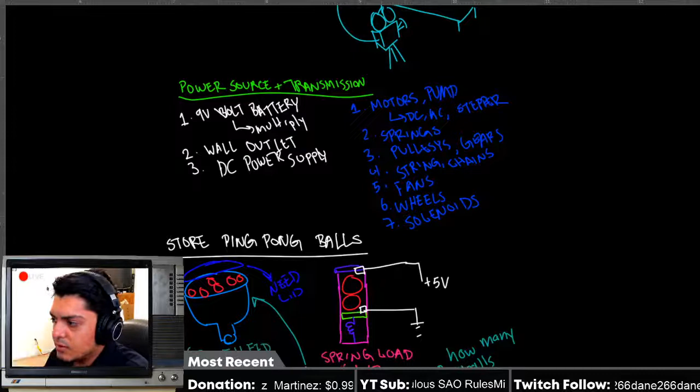We also went over the different power sources. Sorry about this, I realize it should look like - there we go, that should look a little better hopefully. So we went over the different power sources. This is going to be a stationary device, so I really believe we're just going to use a DC power supply - there's no reason to make it wireless.

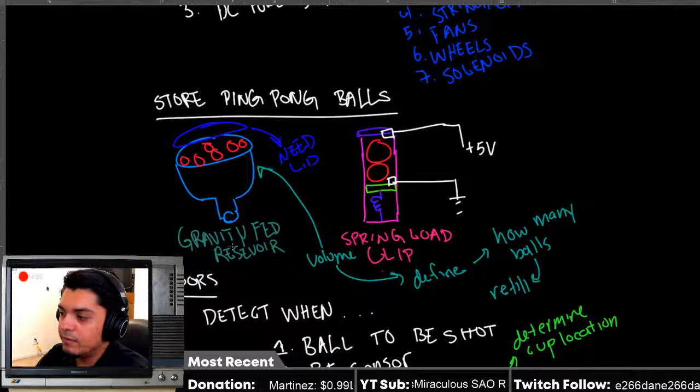And then we also went over the ideas of how to store the ping pong balls, how we're going to reload or just load the ping pong ball launcher or shooter. We came up with 2 different ideas: using a reservoir, basically a bowl, and then gravity feeds into the launcher, or we use a spring-loaded clip - just use a spring to push a ball up to the position where it needs to be and then launch it, and it repeats the action since we have a spring.

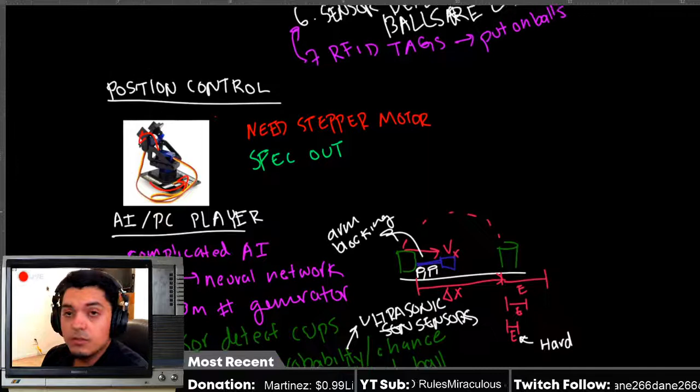We also went over the different sensors. There's a lot of different sensors we can potentially use depending on what design we choose to go with. And then position control - this is how to control the position of the ping pong ball shooter or launcher. Basically, we need to orient the launcher horizontally, so there's some rotation this way and then some rotation this way, so that way we get all positions controlled, I guess.

And then for later features, we have AI and PC playing ideas. This is again way later on in the project, but let's say if we don't want to do this over the internet, we could just have this robot play against yourself, I guess. We came up with different ideas how we're going to do that, what other features might be useful or make the game more fun.

And I believe that's it. So that was a brief overview of what we did. Going back to here, we'll come back to the spring-loaded shooter in a bit. I think we should just finish up these last two so we could finally choose a design or a mechanism.

Okay, so the pump air shooter. How this mechanism works, just to refresh everyone's memory, essentially what we have is a pump. I drew it as a hand pump or a push pump, I don't know what you call this, but essentially we pump air into a vessel or reservoir, and the reservoir is closed off, meaning it could store pressure. We basically store whatever amount of pressure we need to vary the length of the ball being thrown.

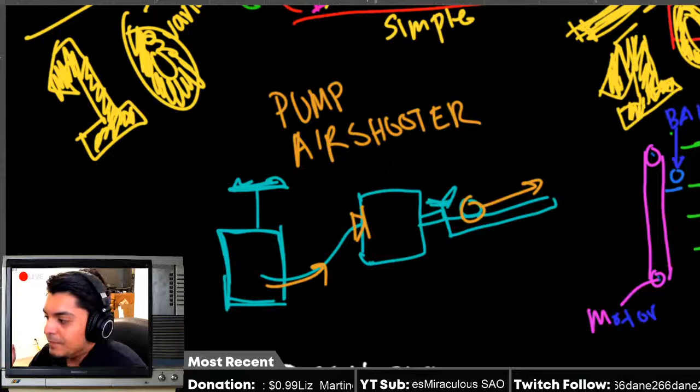So yeah, a check valve just basically prevents air from going, or allows air to only go one way, I should say. So there's that.

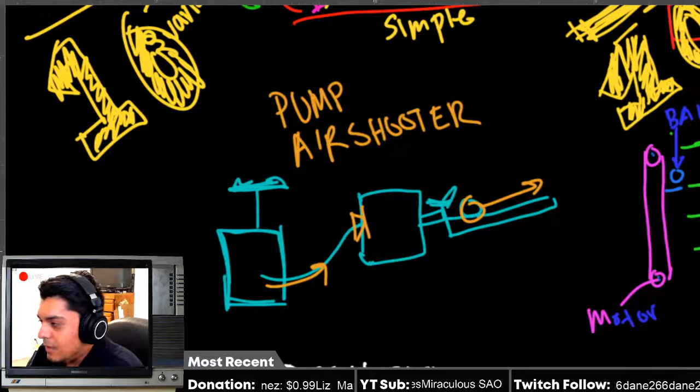So how we're gonna do this? To be honest, this is no different, in my opinion, from the fan shooter. And the reason why I say that is because the principle is practically the same. The only difference is how we're gonna basically move the air, right? I mean, here we have a fan. Here we have a pump to store pressure.

A cool thing about this is that we could load a ball whenever we want, as long as the valve is closed, which is a better design than here. Because last time we were thinking about why the fan shooter would be a difficult design, and it's because we need to place the ball at a specific moment to even have the device work properly.

And the reason why I say that is because we need to vary the speed of the fan, right? And the ball needs to be launched at a specified distance, or whatever is determined by the user. And if we put the ball in place, right here, and then turn on the fan, there will be a minimum threshold at which the fan speed will start increasing the ball's movement, or the ball will start moving at some minimal threshold.

And that can be an issue, because if you want to launch the ball at a specific fan speed, we won't be able to do that. So what that means is we need to get the fan speed up first, and then put the ball where it's supposed to be, so it can be launched at the correct speed.

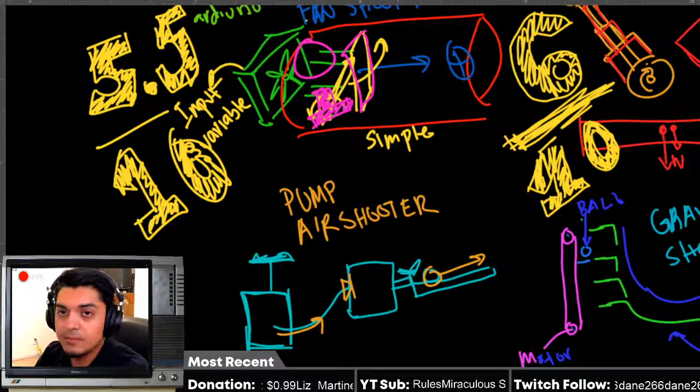Hopefully that makes sense. And this design makes that simpler, because we have this valve here. That means we can store all the pressure we need before, regardless of where the ball is. So that's a plus in this design. I don't know what you would categorize that as.

Convenient? How do you say it? It's just a better, or it's not ball dependent or ball location dependent, which is a plus.

I swear this page is gonna be so cluttered by the time we're done. No ball location dependence. So that's a plus, I think that's a plus. That may be an issue, but as far as I see it, it's a plus.

Another thing - hey Dane, nothing much has changed recently. I just had a pretty casual weekend, you know, just hanging out, nothing too crazy. How about yourself? I don't know, what have you been up to?

So besides that, we don't have to use a hand pump. We obviously don't, because we could just use any other pump, really. We could use an electric pump, air pump. Yeah, we don't have to use this hand pump, so that's just for pictorial purposes.

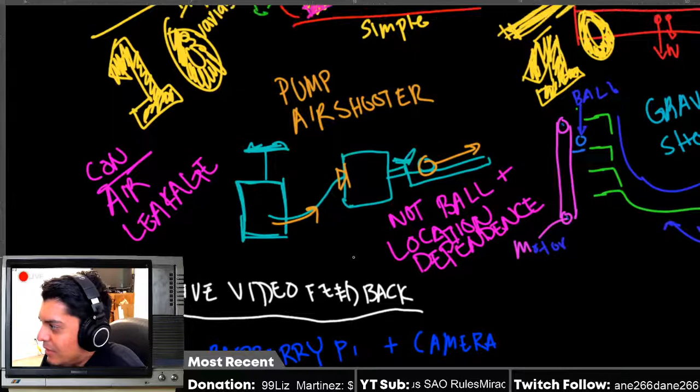To be honest, I want to just start 3D modeling—just start designing this thing, getting into the technical details. But it's going to take some time. Hopefully by the end of this week we get everything situated and ready for some actual design and building.

I don't see what else could be an issue. I guess controlling the pump—oh no, you just turn it on, I guess. Controlling the valve, we'll probably use some sort of... I'm pretty sure there's some kind of valve you can control electronically.

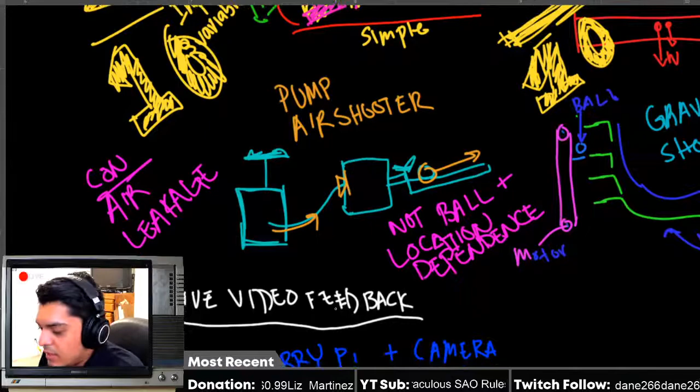I said there's 2 motors per joint—I'm referring to the catapult. 2 motors per joint for a simple arm. I don't know what the second motor is used for. Maybe that's... yeah, I'm not too familiar with robotics, but if they say 2, I guess they use 2. I'm not sure why they need 2. I could think out loud, but I don't know why.

Maybe to offset it? Yeah, some things you just get surprised about when you learn something new. It's just like, wait, that's how it works? And you're like, yeah, that's how it works. So, yeah.

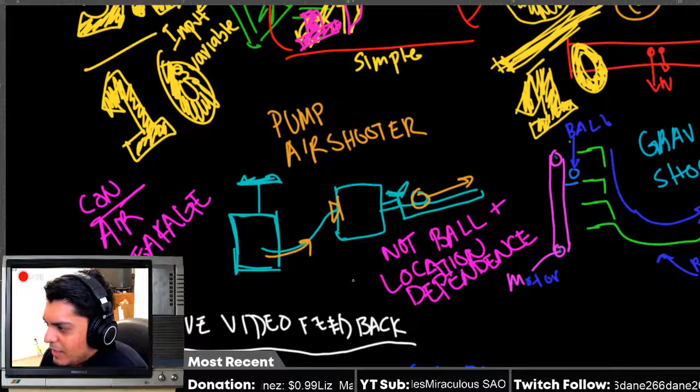I don't have anything else to say about this pump air shooter. It's good, I don't know if it's the best. Well, let's put it in relative terms—is it better than the fan shooter? Maybe. The only problem with the fan shooter is if you could figure out how to place the ball at the right time, then it's not an issue.

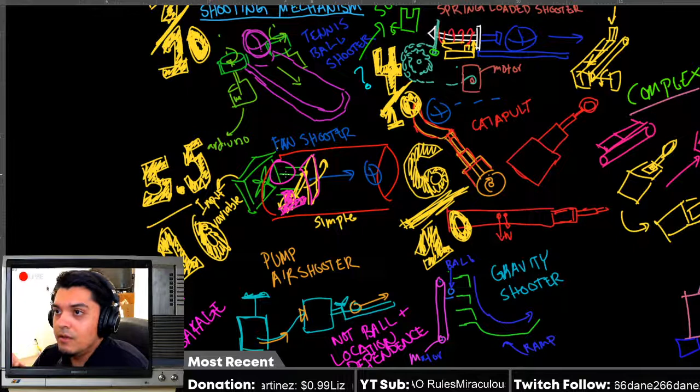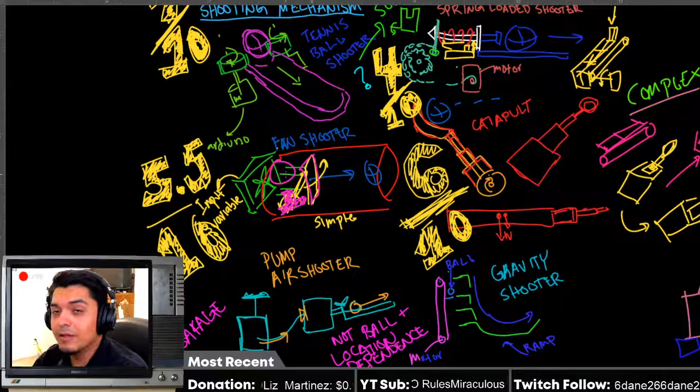Some said 6 motors, but that might be for the whole thing. 6 motors is a lot, to be honest. Yeah, because some of these robotic arms, as much as I know, have various degrees of freedom. There's 6 degrees of freedom, right—translation in X, Y, Z, so you can move in that space, and then rotation around each axis. So if it's a full-on mobile robotic arm, maybe it has the ability to do that, and that's why they need 6 motors. Maybe that's what I'm thinking. That's a pretty crazy robotic arm if you think about it—it could move fluidly in space. That's pretty crazy.

Okay, so relatively speaking, it's on par at least with the fan shooter, I'll give it that. Is it better than a catapult?

The catapult is a more difficult design simply because we have to take into account the length of the arm—how far the ball is from the axis of rotation, because that determines the speed of the ball, the linear velocity of the ball. So it takes in more things we have to worry about. It's more technical, but that doesn't make it a worse design—it's just more technical. But that does require knowing where the ball is on the arm.

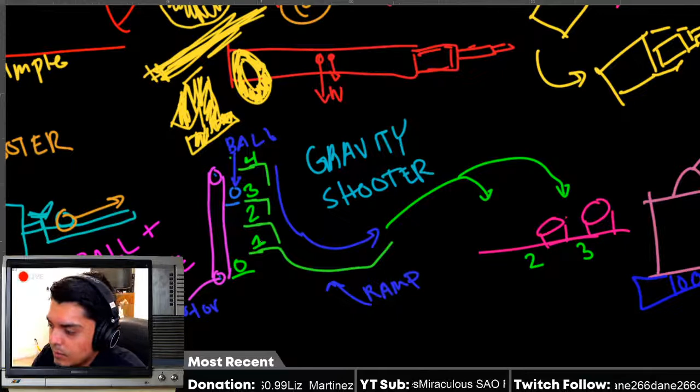So if someone wants to launch the ball very precisely, like maybe what if we place the cup in a position—let's say we have a table, right? This is a cup, and then here's another cup. What if we say, if we launch the ball from state 2, we launch the ball and it happens to land right here, and then we launch the ball again, and what if we land right here? Since those positions are technically, in theory, locked in place, the user can't go in between 2 and 3 because their power levels are dependent on the predefined system that doesn't change.

So if the game happens to place a cup, which is likely, in a spot that this mechanism can't launch at, then we can't do anything about that. So it's almost like the user is stuck in limbo because they can't accurately get the ball to hit the cup. That's pretty major, because now we gotta be worried about the position of the cups, or the physical position of the robot. So that is definitely an issue, I think. Now it might be negligible, but it is still a possibility. That affects the game tremendously, and I feel like that's pretty big.

What else can go wrong, or what can go right? It's gonna be huge, I think this thing is gonna be big. This is a fairly large system. So I don't know, like if we do some quick math to figure out how high this would get—well, I guess this depends on the angle, really.

It's not based on—well, it is based on how high it is, but actually the angle should be 45 degrees, and I'll tell you guys why. The angle should be 45 degrees, simply because if you do the math and all the analysis, 45 degrees will launch the ball such that it's the farthest distance that the ball can go. So we would have to make sure, if we want to really optimize the efficiency of this ramp, we want to launch the ball at 45 degrees. Again, because that's the maximum distance the ball can travel or be launched at, given the system. So we would want to give that 45 degrees.

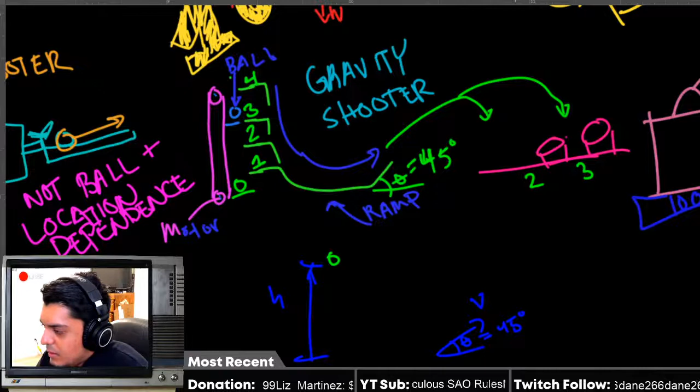By knowing that, we could determine that if initial potential energy goes into kinetic energy, mgh is equal to the final kinetic energy, which is 1/2 mv squared. So we could find the velocity to be square root of 2gh. That's the magnitude of the velocity when it leaves the ramp.

So from there, we know that the farthest distance is dependent on the horizontal velocity of the ball. This is actually a pretty classical problem. If you're studying physics, you would definitely see something like this.

Again, this is the ramp, so we're launching it. The horizontal velocity, Vx - I haven't done stuff like this for a while, so it's a nice refresher - the magnitude, which is square root of 2gh, times the cosine of theta. This will determine how far we could launch the ball in theory.

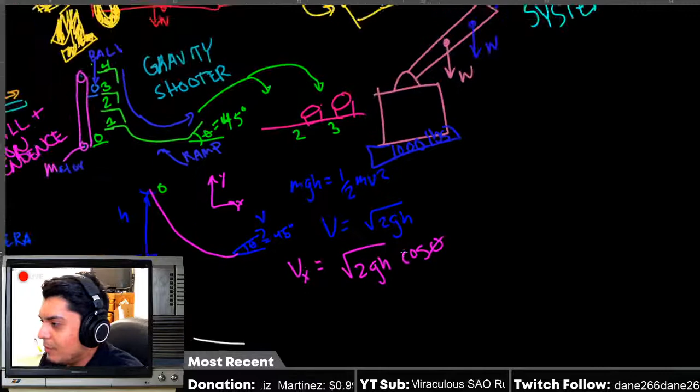If we're given the speed, what else do we need to know? That's the initial velocity in the horizontal direction. This is going to be more detailed than I thought. I don't want to do all the math because I don't want to bore you guys, but essentially, once we get the horizontal velocity, we can determine the distance.

So distance will be velocity times time. We don't have to make this time dependent because we know that when the ball's launched, it's going to come back to the same location in theory. So this will be the maximum distance, from here to here - we'll call that d. We could use that to determine how far we could launch the ball.

Maybe we're overshooting it, to be honest, but we're in control of that - we're in control of h, so we could control that completely. We could vary this height to determine our actual bounds. This is getting too detailed because we didn't choose this mechanism to design yet, but this can tell us whether or not we're going to hit the cup.

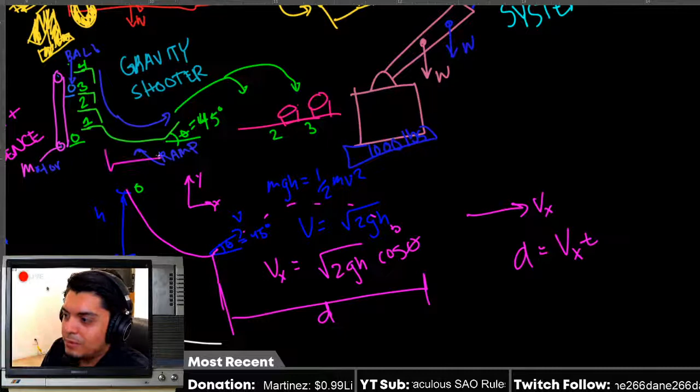Maybe we're going to overshoot the cup, maybe our ramp is going to be too small, or maybe practicality comes into play and we make this ramp too long. There's a whole lot of different criteria when it comes to this, but I don't want to go too deep unless we choose this design. The point is, if we have a discrete system, we want to make sure it's still able to hit every cup on the table.

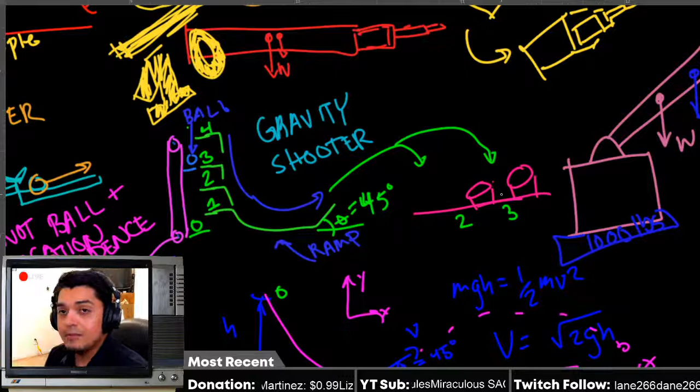If it doesn't, that's a major issue - I believe that is a big con. That's what that brief tangent was about. Con: I'm going to call it limbo, because if the player can't hit this cup ever based on our design, then they're in limbo - they can't progress anymore, so they're stuck there. I feel like that's probably the biggest flaw out of all of them, in my opinion.

Because all these other designs seem analog, or they're variable. The spring-loaded shooter, if we change it to a piston, I still have to think about that - I'll research more about whether we can make it variable. But yeah, every other design has the ability to be fine-tuned or be a precise number if need be. So maybe not the best design - pretty cool in concept, pretty classical, pretty old school.

It's also going to be big - I feel like that's a drawback. If you can't put this on a table or on a stand so it's level with the table, that's an issue. What are you going to do? You're not going to launch this from the floor. I mean, I guess you can, but it's more inconvenient in terms of space. So it's also big.

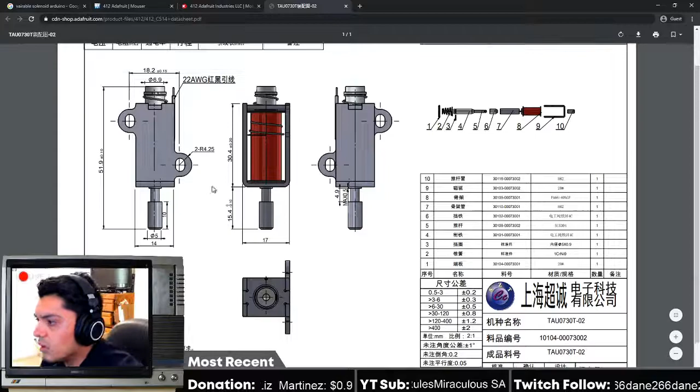Oh, DigiKey as well. Yeah, classics. Where's the... okay, we got a drawing. Ooh, okay, but it doesn't tell me. I'm assuming Chinese, it's 24 volt, which may be an issue. Is it DC? That's DC 24 volt, but can we vary it?

Let's see how to vary a solenoid. There's solenoid actuator theory, let's see. Solenoid and the basic electrical, yes. In and out, yes. So the solenoid moves in and out to control the piston, and restores its original state by using a spring. Yes. Both types of solenoids, linear and rotational, are available as either a holding, continuously energized, or a latching type, on-off pulse, with the latching types being used in either energized or powered off applications.

Not what I'm looking for. Okay, right here: linear solenoids can also be designed for proportional motion control, where the plunger position is proportional to the power input. That is exactly what we need. When the electric current flows through the conductor, it generates a magnetic field. Yes, that's how you control it.

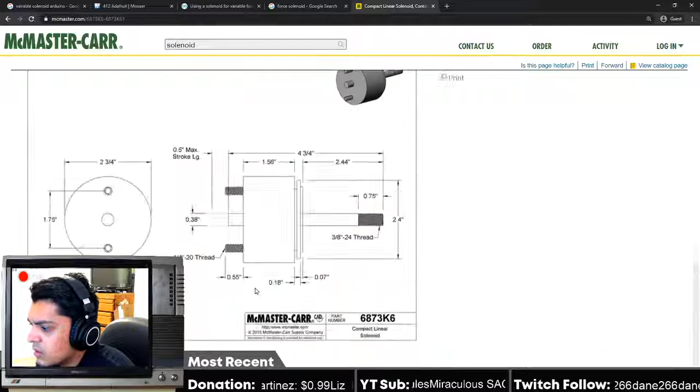How do you wire this as well? I mean it's probably pretty obvious, but you just connect 12 volts to it, I'm assuming. I'm assuming these are the positive and negative leads. So it's a 1/4-20 thread. We don't need... does it give you a spec sheet? I guess this is a spec sheet. Does it come with a wire? What if I did this? What else is important, the diameter?

Yeah, it's fine. We just need to make sure, I guess another important thing when it comes to launching the ball if we use a solenoid, is to make sure that the piston lines up directly in the middle of the ping pong ball. It shouldn't be a problem, in theory it shouldn't be a problem, but it might be. It's also dependent on the tube that we choose, so you have to think about that.

But besides that, I feel like it's $162. I don't know about that one. That is a no-go. Okay, let's try something else. I didn't think they were gonna be that expensive.

What if, okay, let's say 12 volt or 6 volt DC. No, 12 volt DC. Oh, we don't need sealed.

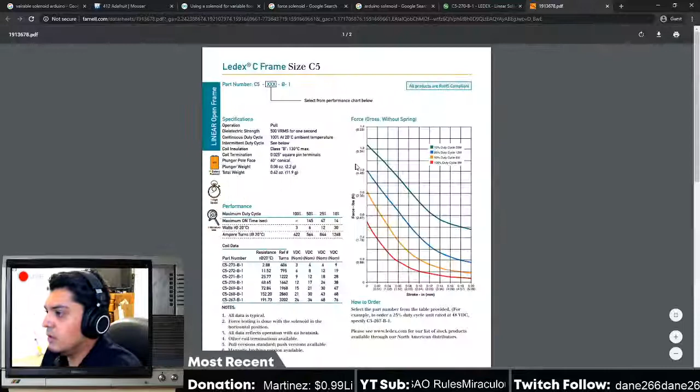Continue, okay wait. The C frame, 500 VRMS. Oh here we go, I missed it. Okay, let's see, oh here we go. Force graph without spring. Okay, so this is it being pushed back, that's what this graph is showing. So what do we have? Well, this is a pull. Oh, we want push, do we have push? Oh, we don't. Great.

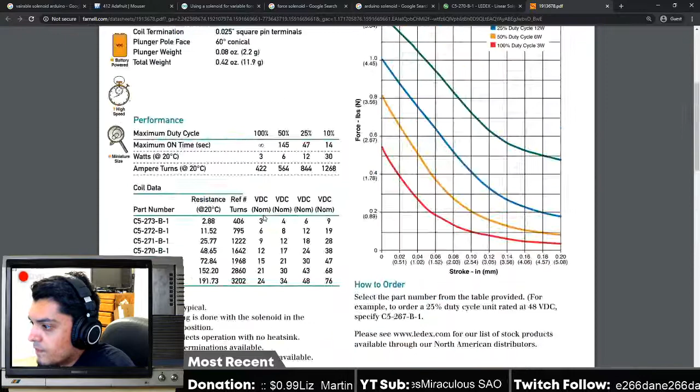Okay, so here we go. 100% duty cycle, 3 watts. So we're getting around half a pound of force. That's probably fine. I can't put that in perspective. Like if you throw a ping pong ball, how much force are you giving it? Not much, probably.

So if we give this 10% duty cycle, we get... oh, now I get it. I think I get why there's an inverse relationship between the percentage of the duty cycle to the power. Because I think this is the problem I had last time. I was like, why is that happening? But I think it makes sense. What it's saying is that...

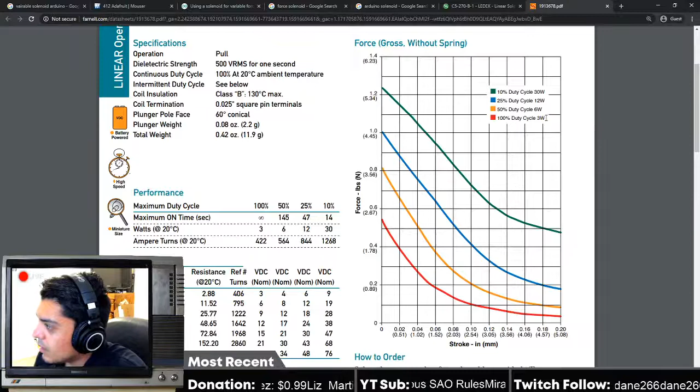If we put 100% duty cycle into the solenoid, what a duty cycle essentially is, is a frequency or a wave of on and off. So it looks like a square wave. Let me show you a square wave. This is my thought process, maybe I'm completely wrong about this, but it seems like it makes sense. So this right here is called a square wave. It's pretty self-explanatory: basically we have a -1 state, or an off state, and then we have a +1 state, being an on state. And then the duty cycle is basically how frequently it is on. So when you have 100% duty cycle, it's going to be a straight line, basically a straight line at 1, meaning it's always on.

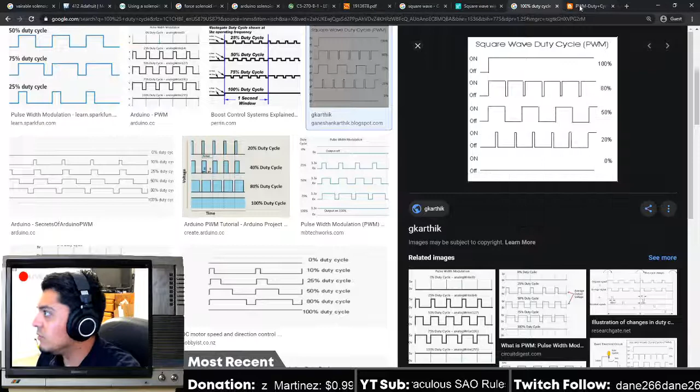So let's see if I could maybe show you guys that 100% duty cycle. If it shows up in Google, I think I am right. Here we go, yeah, so this is probably a better image. So this is our on and off state. 100% means it's always on, 80% means it's on 80% of the time, 50% means 50% of the time, and 20% means 20% of the time, 0% of the time, and so forth.

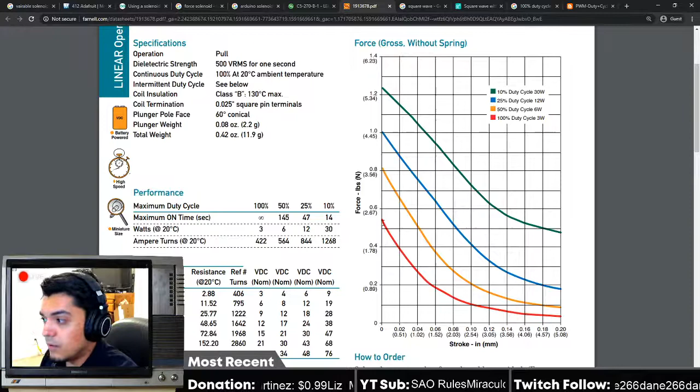So the reason why I think there's an inverse relationship between the solenoid's duty cycle and the power input is that if you have the solenoid always on, it doesn't allow enough time for the magnetic field to build up in the solenoid. Therefore you get less force, so that's why we get a low force, which is red. So if you have a 100% duty cycle, it's saying that we put 3 watts in because it's not a lot of energy to launch the solenoid, since it doesn't have enough time to recharge or rebuild that magnetic field. And therefore we're getting a low power input, or output, I should say.

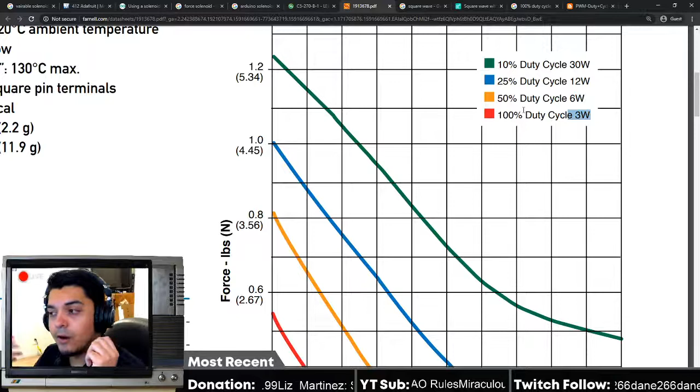So if we have 50%, it means it's 50% on and 50% off. During that time of being off, I'm assuming - correct me if I'm wrong - that being off allows the magnetic field to build up, giving it more energy to be launched at a higher speed. That's why I think there's an inverse relationship. So if you have a 10% duty cycle, we should be able to create 5.34 newtons of force, I think. So given that, we can vary this thing, and if we could get 5.34 newtons out of this thing, this is pretty good.

Dane, you're crazy, I'll give you that. Yeah, I remember staying up late, this was a while ago. By the way, if you guys are listening, Dane, he's a frequent member in the chat. He's pretty much up late. I'm guessing somewhere outside the U.S., I'm not sure, but he's basically up late watching the stream, which I really appreciate. Dedicated fan, I really appreciate that.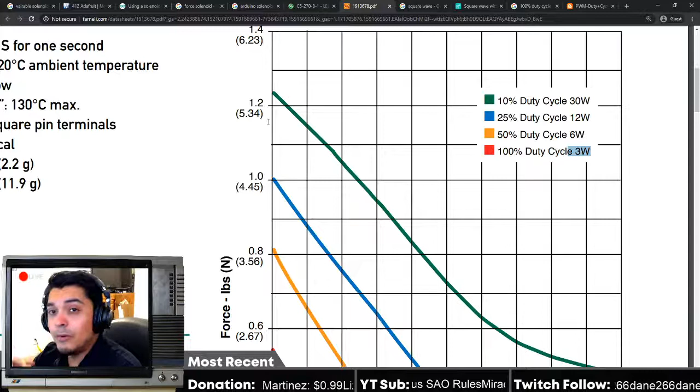But he's out late, and it's already becoming light outside. So I remember this one time, it was like a while ago, back when I was a kid. I slept over at a friend's house, one of the first couple times I slept over, and I remember we just stayed up all night playing video games. We did not care, it was one of the funnest times. Yeah, those were the days, just playing video games all night.

3:33. Damn, that is pretty early, I'll tell you that much. That is pretty early in the morning.

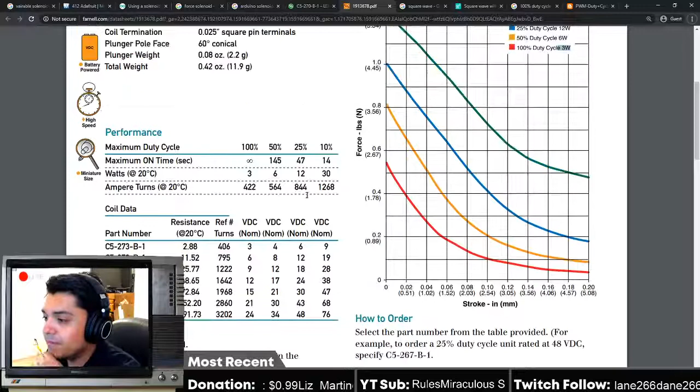Anyway, getting sidetracked a little bit. So yeah, I think we're fine. I need to see how this thing works though. It's high speed, it's small, it's lightweight, and that means we could put this thing on something that can move and rotate probably pretty easily.

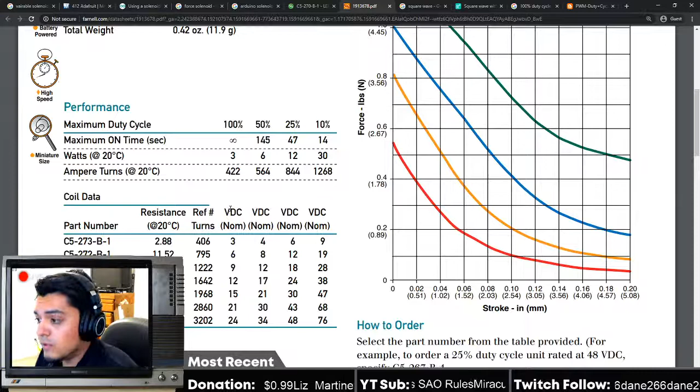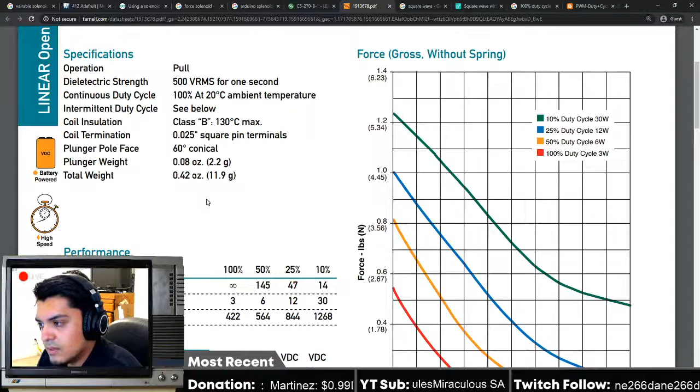Does it give us the weight? Plunger weight, total weight - about not even an ounce? Not even an ounce? It seems so light. Huh, okay. How small is this thing then? Wait, they had a diagram. I'm assuming that's in inches and bold, and then this is millimeters.

Yeah, wait, so how does this thing work? If you guys have never seen an engineering drawing before, this is called an engineering drawing. It's very loose, more consumer friendly than anything. But how they display these different views is two-dimensionally, because we give a piece of paper to someone and tell them how to build it, or at least give them some idea of how it should look. It's very useful if you buy parts and need to inspect the part before using it, because if you don't inspect it, you don't know if you got the right part or if something's wrong. It's basic inspection - this is how they show how to fully define an object without using words, or using a minimal amount of words.

So this is a third angle projection, I believe, meaning this is the most common way engineering drawings are done in the US. This is the front view, the front of the device, then the right view, the right side of the device. Then the left view, left side of the device, then the bottom view, and if they had a top view it would be up here. Technically you only need 3 planes - depending on how complex the part is, you only need 3 planes to fully define the part. Here they did 4, simply because there were holes on the bottom side that you don't really see here - you see it with the dash lines. There's also this hole on this side, or not a hole - this arm, or this piston.

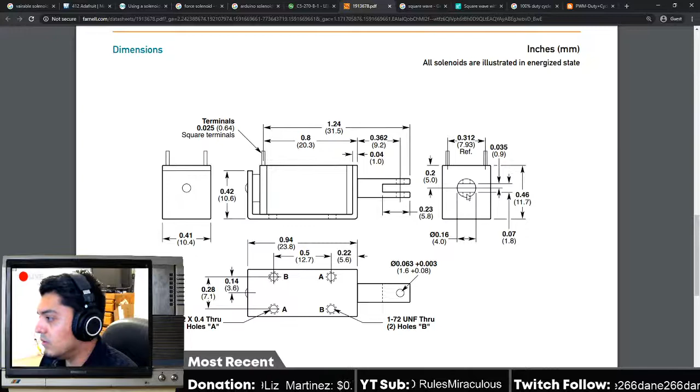Oh, you're from Britain. Well, that's pretty cool, actually. How's it going over there? I feel like, I don't know, I really don't know what's going on too much over there, but that's pretty cool. It is pretty cool. Huh, yeah, it kind of blows my mind that people who watch my channel or even my streams are from around the world. Most of them, a large majority, are from the U.S., but it's pretty cool to see people around the world watching. So it's really cool, really cool.

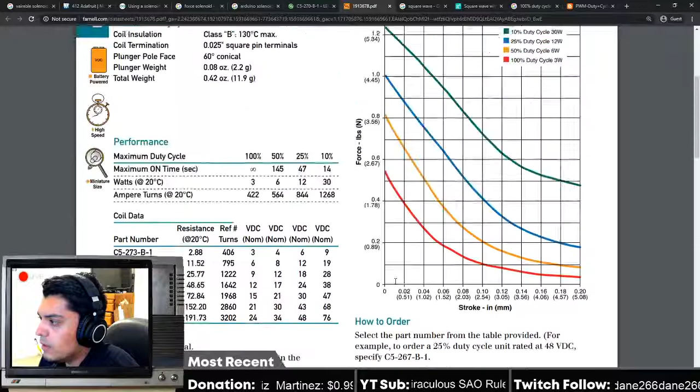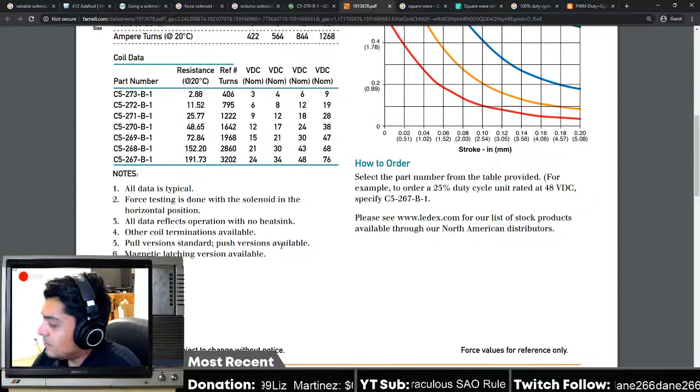Yeah, to be honest, over here is kind of crazy. I live in California, and the coronavirus has been pretty gnarly. They're actually opening stuff back up, which is kind of mind-boggling. I feel like it's a little too quick. But if people are willing to go out, I guess, do you. And then we also have those protests going on, which is another issue. It's pretty crazy. And the combination with the virus is not really a good thing, at least in terms of spreading the virus.

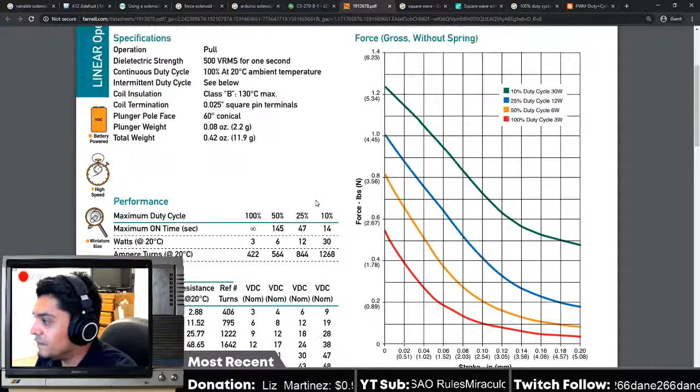Yeah, so I don't know. I think we're moving a little fast, but I guess people in California are ready to get back to the normal way of things. So yeah, it's pretty crazy. But hopefully it gets better over there in Britain, like for everywhere, to be honest. Crazy stuff going on in the world this year.

Okay, back to the design. If we choose this, I think we'll be fine. And it's cheap, and we can control it. So I just want to understand why they put a little pin here. What do we attach there? I guess we could attach anything we want, really. It doesn't really matter.

But that's so weird. Can we get a YouTube video of this thing? I just want to see it operating. I'm just interested.

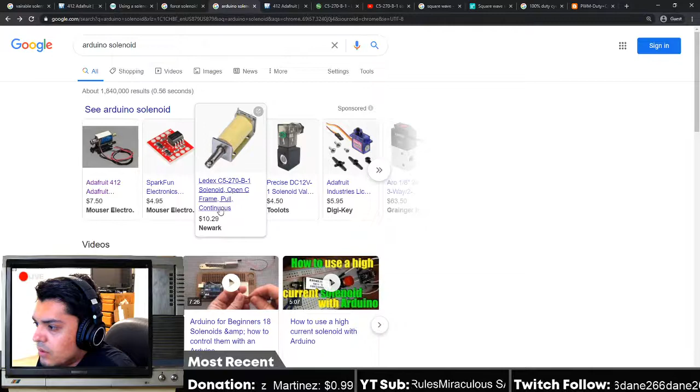See, but the one we saw seemed like you could vary it though. Frame pull continuous, this one's a pull. You want to push. That's the key thing about this, we need to make sure this thing pushes, not pulls.

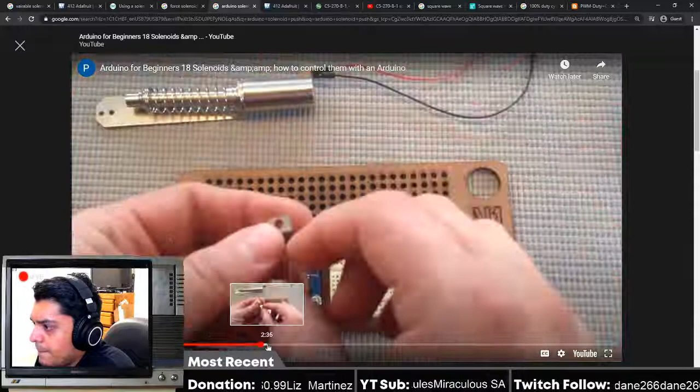Okay, let's try it, let's see if this solves our problem. So... yes. Can he vary the speed? See, he has Boolean logic too, which I don't want.

Okay. So that's like the duty cycle. Huh, okay. I got angry and threw it at the wall.

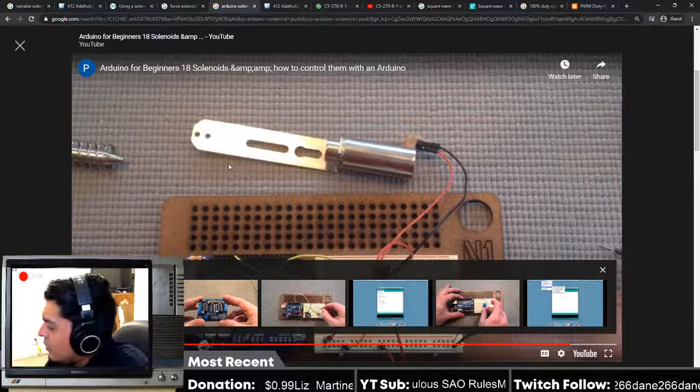I don't know what moams are, I don't know if I'm even pronouncing that right. To be honest, moams, I'm kind of curious. Is it like a chocolate or something? It sounds like a chocolate. Oh no, it's a... oh, these are like... oh no, someone's awake, you better watch out. Okay, yeah, this looks like nerds. Oh no, these are like starbursts. I don't know what these are, to be honest, like Laffy Taffy almost, yeah, I don't know. I'm from America, so I don't know what those things are. Anyway, we're getting sidetracked.

I need a variable solenoid. Does anyone know if there's such a thing as a variable solenoid? I don't know of one, to be honest. I feel like... varying the force of a solenoid.

The reason why we're searching this so hard is because this might be the potential design that we choose.

More like Starburst, okay yeah. That's what I thought, it looks like Starburst, to be honest.

Varying the force of a solenoid. Or do we know? Maybe. For variable force, this is... I think we looked at this before. Yeah, we did. Controlling a solenoid. We looked at this too. Yeah, I don't know if we can control it. I want to avoid the on-off state. Yeah, I'm not sure if we can anymore. I was pretty confident at first, but now I just don't think you can.

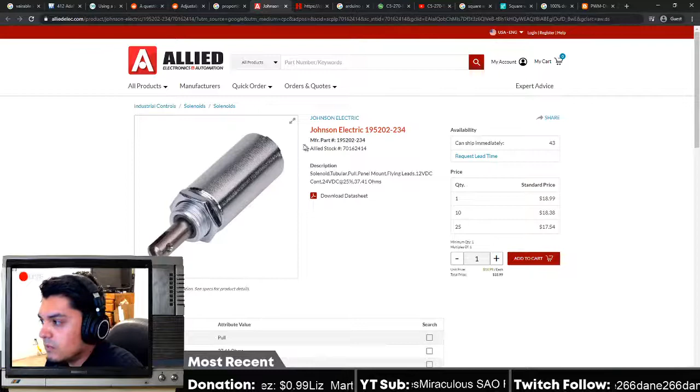How about this one? This one looks right. So that means I need to get something that goes on the end of this, because the piston will just shoot out of this. This is 24 volts DC. Can we get one at 12 volts?

So this is a... okay, here we go.

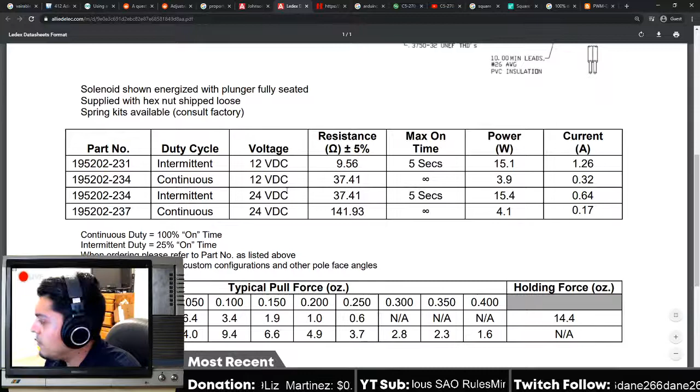Don't let her find you. Or just pretend you're asleep. Do the classic Scooby-Doo trick, put a pillow underneath the blanket and say you're asleep, then pop out the other door in the hallway, like some other Scooby-Doo trick. I'm stupid, by the way, don't listen to me.

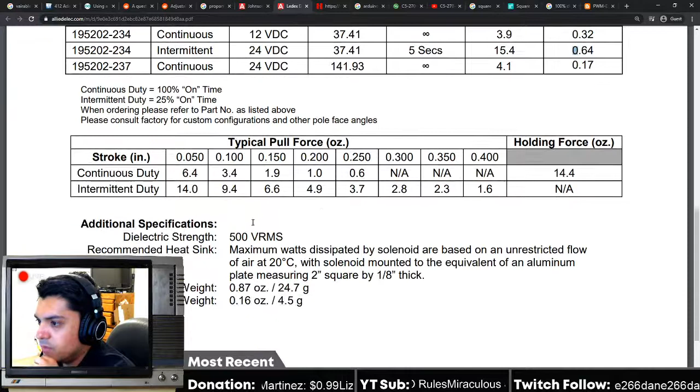Here we go, 12 volts. Current, blah blah blah, typical pull force stroke, continuous intermittent duty cycle. We want push though, we don't want pull. Why is it only giving us pull?

I want push, I don't want pull. Here we go, here we go. This one? This one's push-pull.

Let's see. What is this? This is not even like what I looked up. I can't find anything. If you guys... well, no, let me see. Do you?

How about this one? Does this give us a spec sheet? A useful one? Oh no, this looks more complicated. Here we go. So maximum duty cycle 10, whatever watts, blah blah blah, volts DC nominal. Okay, typical force at 20 degrees C. Well, this is, no, they're all 20.

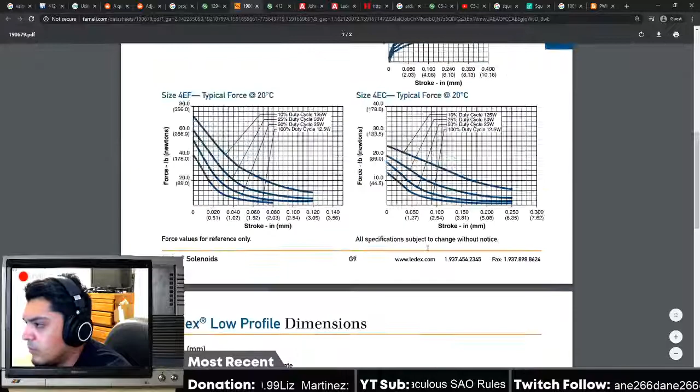Okay so this one, what makes this different? Are these... oh, they're different sizes. Okay, so that's what's different. Wait, no. Oh, this is speed, typical speed, and this is force, typical force.

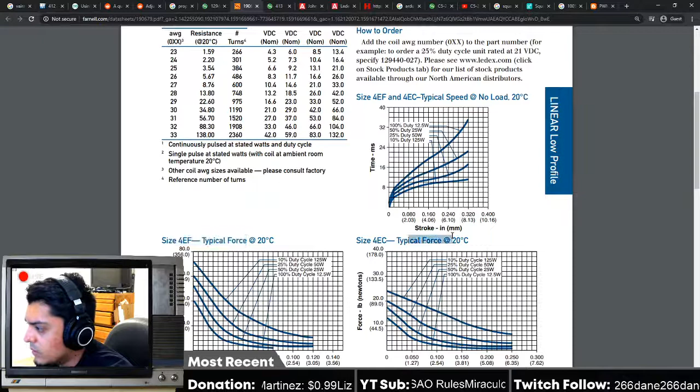Okay, pounds, 20 pounds, that's more than enough. I don't think we need to vary that much in terms of forces, like 10 or so pounds. That's a lot. But I'm still trying to figure out if we could actually vary this.

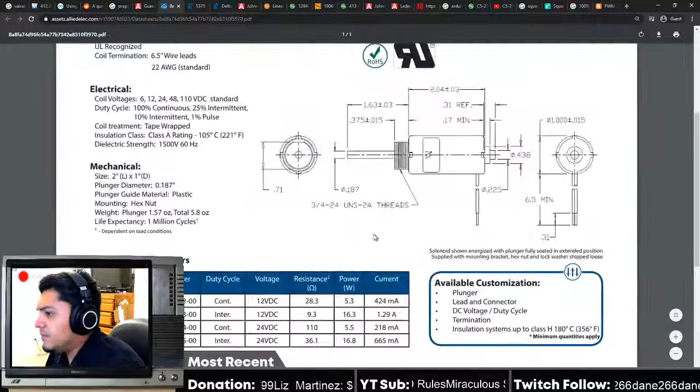Okay, this one? I don't know if we'll ever find one. No. Continuous duty, what is that? Let me see this, so here we go. We have a high performance blah blah blah blah. Coiled 100% continuous, 25% intermittent, 10% intermittent, 1% pulse. Huh. I don't know what, I'm just trying to operate one at a variable.

Okay, I have way too many tabs open. I'm gonna give this a few more minutes before I just say we can't do it.

So again, we're trying to find a valve, a solenoid valve, to vary, because we can use a valve to be binary, on and off, but we need to vary it so we can control the speed of the ball or how far the ball goes. We need to be able to control it variably, which is pretty important. So yeah, we're getting proportional valves, but not pistons, which is what we need. Jesus. Okay.

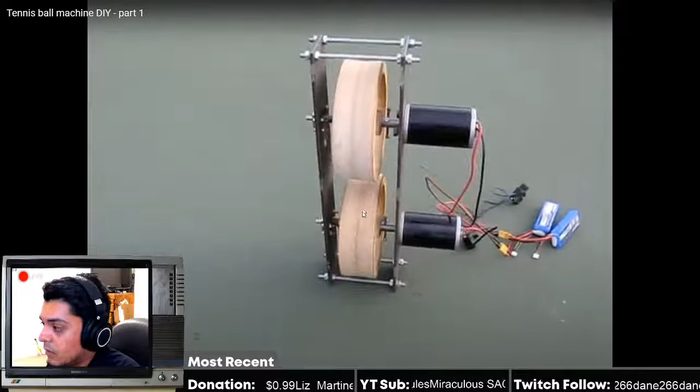So maybe, you put a ball in between. You put two motors, these two motors—oh, I'm not showing it on the screen, sorry about that. So this is what I was talking about. We get two motors, one right here, one right here. We spin them at a certain velocity, and then we just put a ball in between them, and it launches. So if you want to see how well this thing works, I mean it's pretty obvious, but there you go—you just launched it.

So that's what we're trying to imitate with this, with the ping pong ball basically. So we're just going to downsize this thing—smaller motors, smaller battery. We're not going to need that much juice to launch a ping pong ball since they're very light. So I think that is our winner.

So that's good, we chose our design. So I'm going to go over here so that we have a clean space. Let me see. Sorry about that. So we chose—what step is this? This is the mechanism, so this is our shooting mechanism. Let's start off with that first.

So this is our shooting mechanism. Let me draw it out so we have a better idea of how it looks. Should I draw the ping pong ball first? Yeah, I'll draw the ping pong ball first. So it's the ping pong ball. It's three-dimensional.

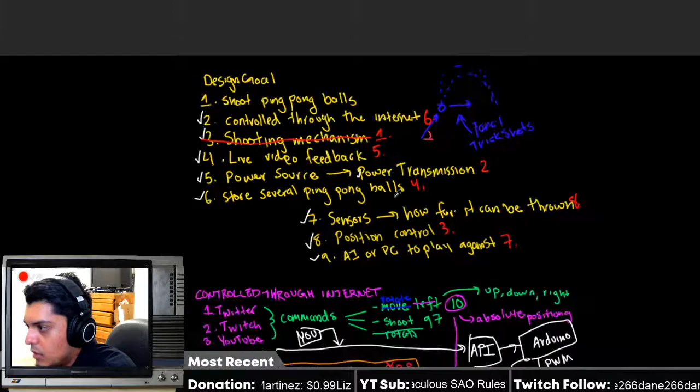Now, we said that was number one to do. Let me not cross that part out. So we finished the shooting mechanism. Next one, power transmission, power source—let's see what our choices are. I think I already said which ones I think we should use.

So the different power sources that are available, pretty common: it's going to be some sort of mobile battery, usually probably a 9-volt, to have enough power to drive these motors, or enough voltage potential to drive these motors. So there's that. There's a wall outlet, pretty simple, but the only thing we need is some sort of transformer, also some sort of rectifier, regulator, voltage regulator.

To do that—that's not the point of the project. We're not here to design a power system for this thing, so that's why I'm kind of straying away from that. Unless we could reuse a power brick—I don't have one near me, but those little wall plugs that have like a brick connected to them usually have all the rectification, all the safety stuff, voltage regulation, all that stuff. We could just basically take that, splice the end, and have that as our connection to our device. We could do that, which if we can, we should.

We also have a DC power supply, which is not an issue, because the robot's not going to be moving—it's going to be stationary the whole time. The only type of movement it's going to have is rotation along its horizontal and vertical axes, so you have full range of motion without translation, if that makes sense. So that's why, since the ping pong bot is not going to be moving, we can use a DC power supply, which is highly convenient. I have one, so we can just use that—not an issue at all.

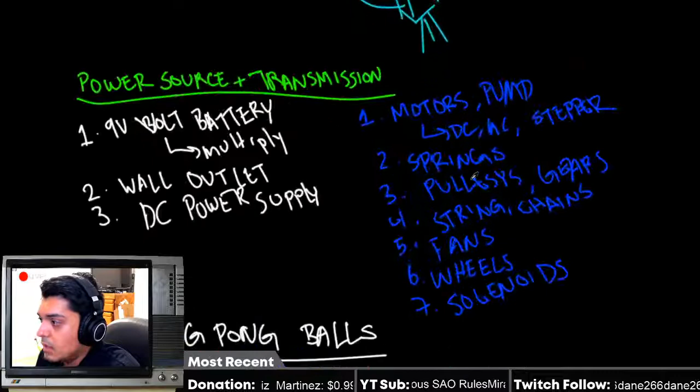So, that being said, I think we should just stick with the DC power supply—there's nothing wrong with that. I'm going to stick with that because it's probably the most general use of all the power supplies. And if we need a switch to use a wall outlet, that's not too big of an issue. The only problem is that we need to find a wall outlet plug that can give us the right power specifications that we need for the project. We can use a 9-volt battery as well—it doesn't really matter, to be honest.

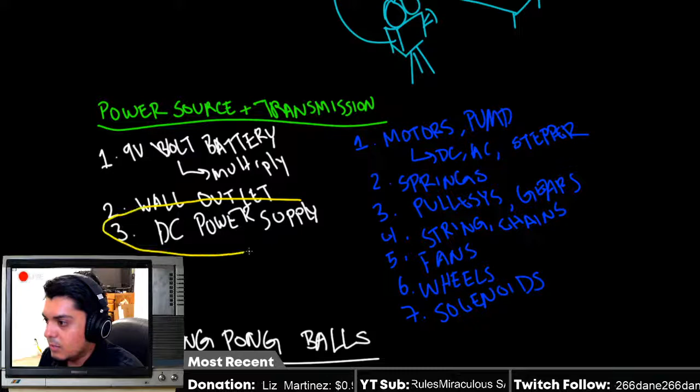If we start off with the most general case being a DC power supply, we could always downsize it or upgrade it to another power supply as long as it gives us the same power specifications. So that's why I think we should just stick with the power supply. I'm gonna circle that because it just makes sense in my opinion. If you guys have any other reasoning, feel free to let me know.

So right here, I'm just making sure everything's outlined so I don't get confused on what we chose and what we're doing. So, power supply. Well, it's power supply and transmission, so we'll put that in there as well.

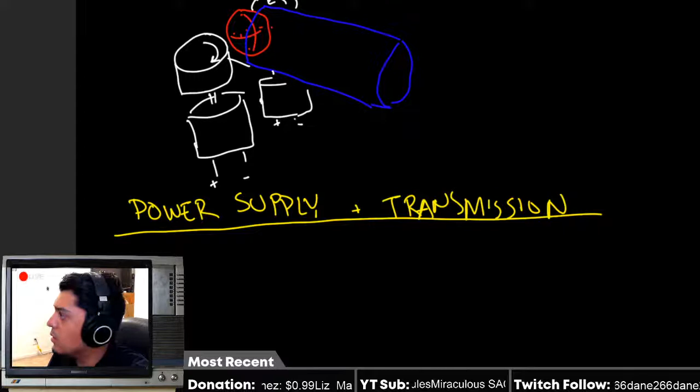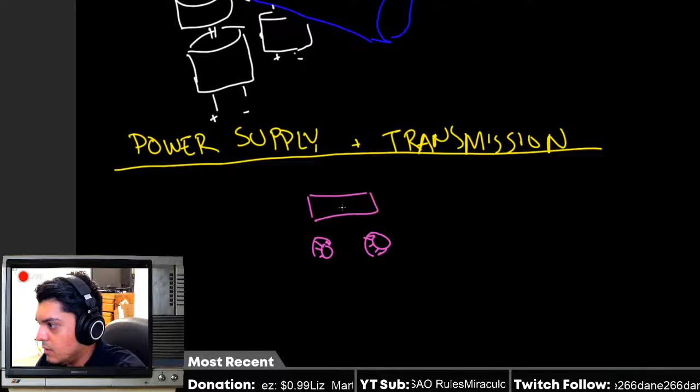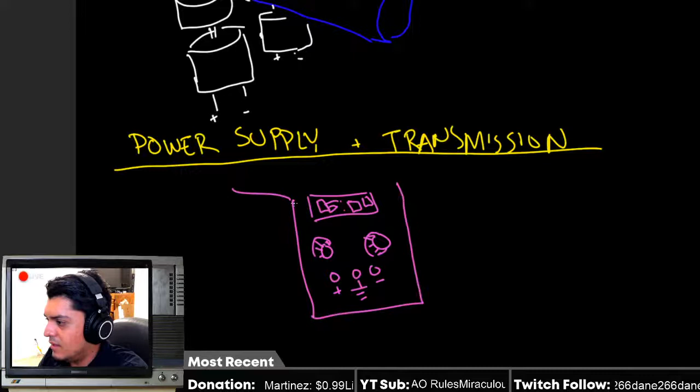Okay, so power supply, how does that look like? It looks pretty much like this. Excuse my drawing skills. I can't draw, but those are like the display. This is like plus, ground, our common ground, and then minus, and then something like a little display, and then this just goes to any other wall plug. So DC power supply, that's essentially what this is.

Okay, so yeah, see, it gets easy once we choose our mechanism. That's the defining thing about this whole project. Once we choose our mechanism, then everything seems to fall into place.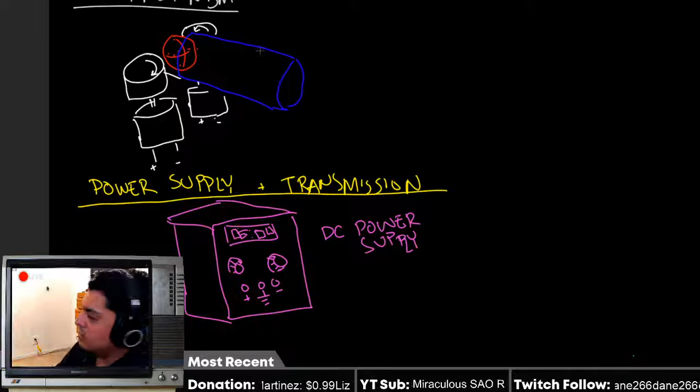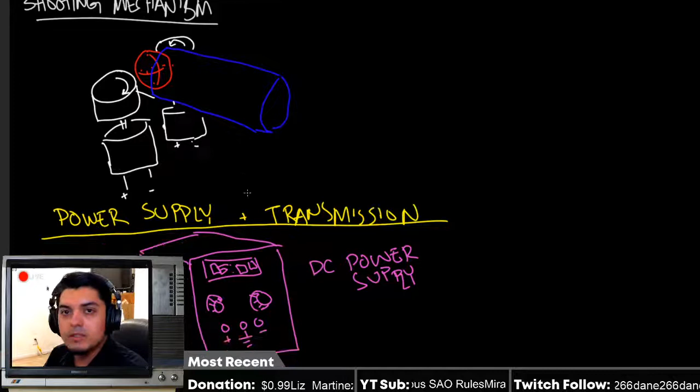So power transmission, we didn't do that, I realize. What type of power transmission are we gonna use? If you guys don't understand what I'm saying, it's not like a transmission in your car, or you can think of it in terms of an analogy — it is a transmission in your car, but really the actual use of the words power transmission means how you're gonna transmit the power from the power source to the rest of the device. Obviously you're gonna use wires or something like that, but what are the actuators? What are we trying to do?

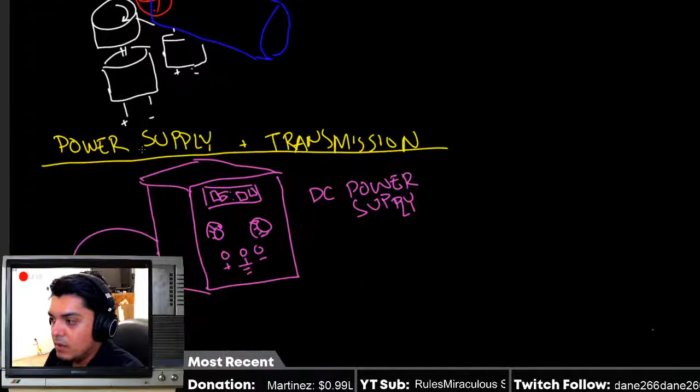It's gonna be DC motors, based off this design. So we have 2 DC motors, and then we're gonna probably send it off to an Arduino as well, a Raspberry Pi, simultaneously. So stuff like that, we could just write those down, we don't need to draw them. So plus DC motors, Arduino or a controller, some sort of microcontroller, and Raspberry Pi.

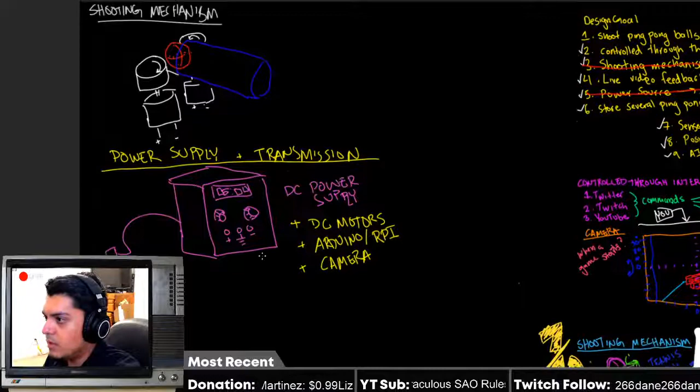What else did I say? Camera. This is how we're gonna — well, maybe it's not really transmission, this is like where the end source is going to be, but our transmission is really just wires. That's pretty much it. So camera, that's what we're gonna be using. If you guys don't know what the camera is used for, I'm trying to make it have live video feedback, so when someone controls the ping pong ball shooter over the internet, you guys can see where the ball is going to potentially land.

So power transmission is done. Position control — this one's also pretty much done, to be honest. We went over position control previously. So we could build our own design, it's not necessary though, it really isn't. We could just buy this thing and just attach it to our design, whatever we build. So that's pretty much that. Again, if you guys think otherwise or have another suggestion, let me know. So we're just gonna use this.

Control-J. Yes, damn it. Okay. Can I do it again, please? Okay, we're good. Okay, so I'm gonna move this. Not that. Okay, well, alright, I'm not gonna — I'm sorry about this, I'm not very prepared for this. Okay, so.

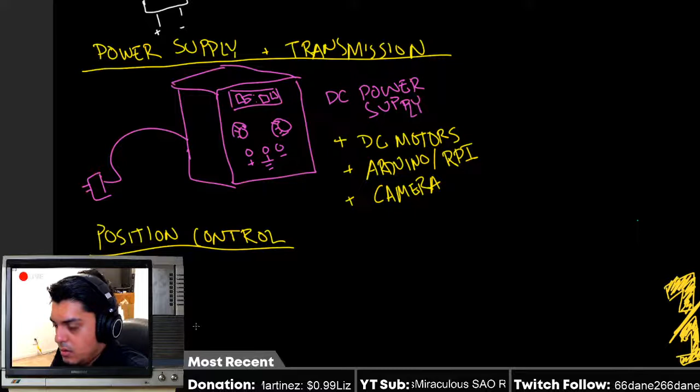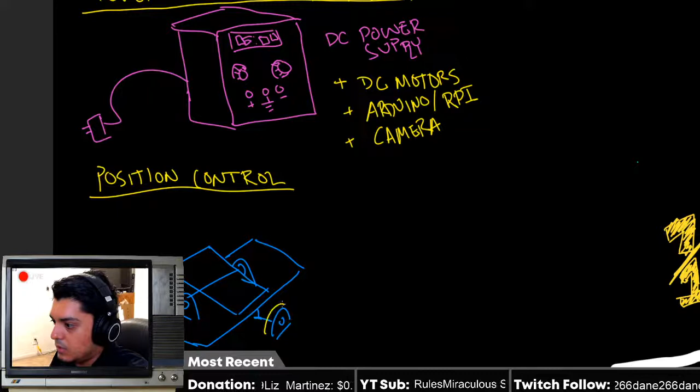Position control, what is the next step? What is it gonna look like? It's basically a rotating platform on top of another rotating platform. So we have rotation in this direction, which is like a plate, or a platform. So something like this, that platform rotates, and then we need to rotate in this direction as well. We put this on a platform — I know it's gonna get a little convoluted — and then this thing is attached to some rail or support, and then this has its own rotation. So something like that, if that makes sense. We can rotate, we could essentially just rotate in this direction or that direction, and then on this one we're able to rotate in this direction. So that should give us all our possible degrees of freedom that we need.

Pretty self-explanatory. So essentially what we're going to do is basically put the — did I do this wrong? I think I did this wrong.

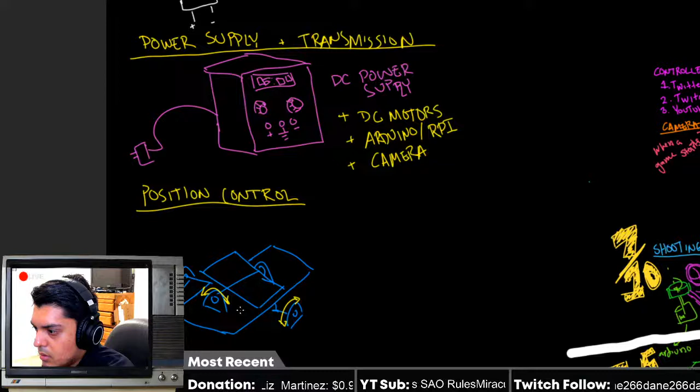Yeah, I did do this wrong. I'm very sorry about that. Okay, hold on, let me see if I could fix that.

So how it's gonna look, something like this. This is how it's gonna look.

So we have basically a bottom platform. I don't really have to redraw this thing, but I think you guys get the point. We have some rotation in this direction. This would be some sort of motor or stepper motor.

So now we're allowed to rotate in the horizontal plane, or along the horizontal plane.

So we're able to rotate in this direction or that direction, and then on this platform we're gonna rotate again, but vertically. So we want to rotate in this direction.

So if we put something like this here, and then a plate here. I should have chosen a different color.

Sorry about this, this is very sloppy of me. Let me change the color. So we'll just connect that, put a plane here.

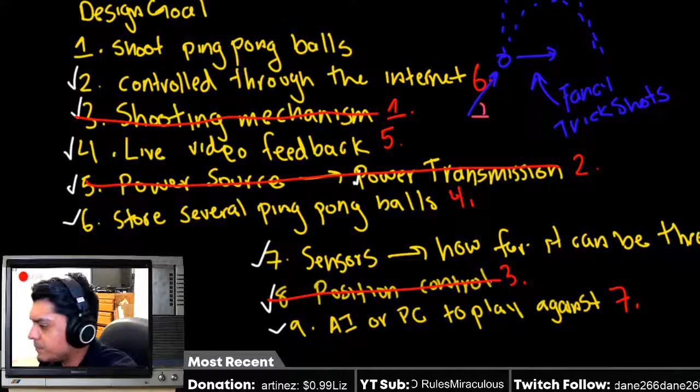There we go. What else are we gonna need to do? Store the ping pong balls. This is the next difficult part. This one goes hand in hand with the shooting mechanism.

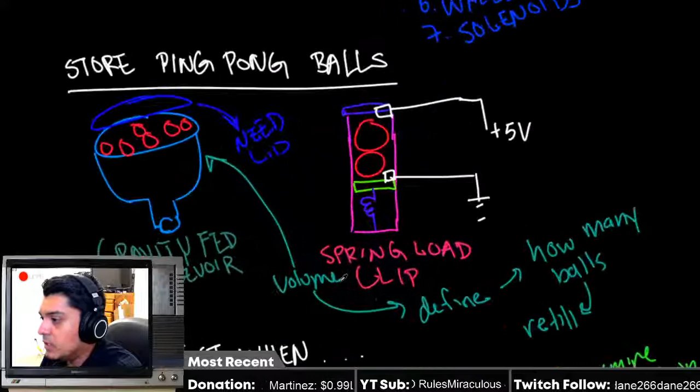So we may need to come up with a new idea or just stick with one of these. Okay, so we gotta really think about...

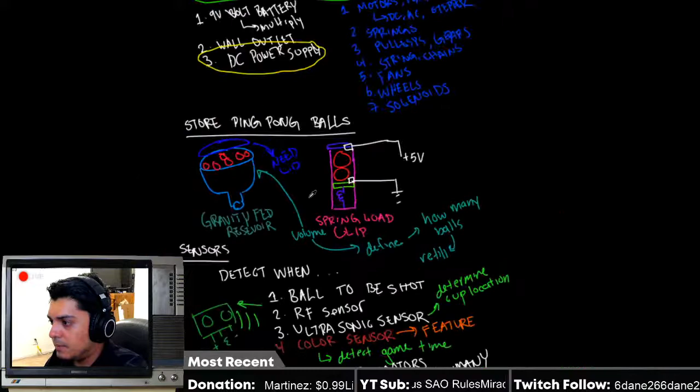What we did today, quick overview of what we did today: we basically went through this whole mechanism, or the whole list, and chose our best designs out of each list. We haven't gone through all of them. We've done 3 of them today.

Hopefully by tomorrow we'll finish these up, and then from there we could actually do some designing work, at least virtually, and then see what we actually need.

Then create a parts list, and then hopefully start building once we get that parts list correct, or as best as we can get it, and then buy the stuff, start building, probably start programming as well, and then we'll be potentially done with the whole project.

I don't know how long this is going to take, but we got through a lot today. I think we made great progress.

So we got the shooting mechanism done. We chose the tennis ball shooter. I wish we got the solenoid one. I really think there is a solenoid out there for our application, but I can't find it.

And I don't want to risk it too. I don't want to buy it and then not use it. So let's stick with our safe design, and it's gonna be this one.

For the shooting mechanism, for the power supply, again, DC power supply. We could change it later if we need to.